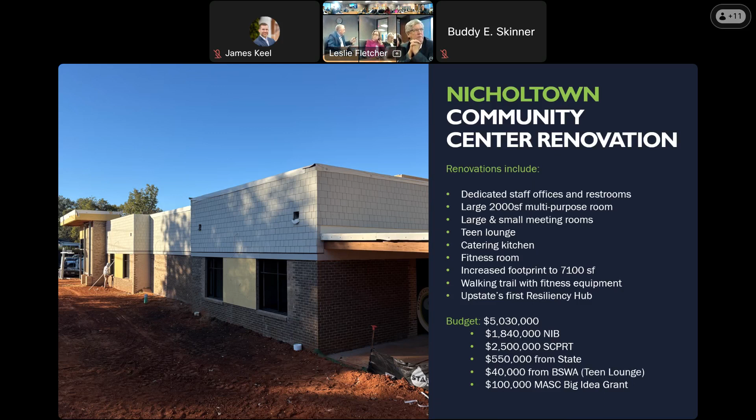That is, well, let me get one more. So this is my list of nine slides, and if you do the math, that's around $6 million in NIB funding. We have two that are working on now: the David Helms Community Center court replacement, and then Cleveland Park, the zoo shelters, walkway, and the playground are upcoming projects that will get underway in 2026.

Thank you, Jeff, very much. So before we move on to our engineering team, are there any questions for Jeff concerning any of our NIB projects that he's been working on?

Just great progress, and it's just hard to put into words, the quality of our recreational activities and facilities now is night and day difference from 10 years ago.

We're gonna have to get a lot done in a couple of years. We really upped our game on everything.

Well, think back to the parks plan from 20 years ago and how the newspapers reported how horrible our recreational facilities were and how they were in such a deteriorating state. So we've come a long way. Really have. It's great, quality is the word for everything y'all have done. I appreciate that.

We've been busy the last several years with our NIB projects.

What's the plan for expanding the resiliency center idea to other places? I think we want to get this one implemented, and then if we think it's a good model, we could look at other community centers for additional resiliency hubs in the future. Okay, and I think that would be the plan.

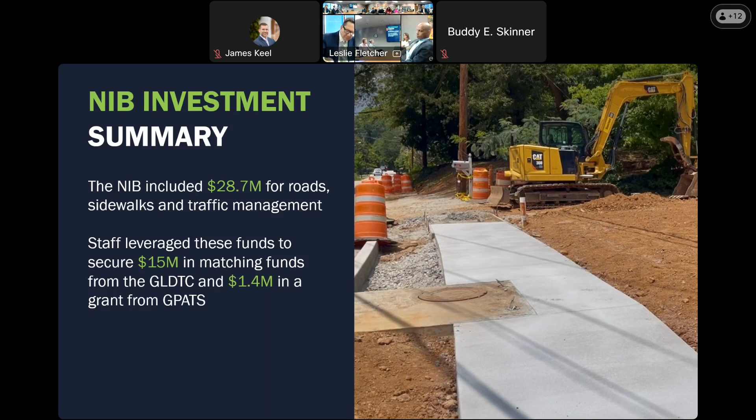One of the big things our team is proud of is obviously it was a huge contribution from the NIB, 28.7 million for roads, traffic, and sidewalks, but we wanted to look and see what else we could do with that money. How can we leverage that for more? Between GLDTC and GPATS, we were able to get 16.4 million in matching on top of that 28.7. So we were able to take that money and take it even further, and I think that was a huge win for everybody. It allowed us to get a lot more done with our dollars.

Another big thing to point out is we were able to look at our existing programs. Instead, we ended up getting a CDBG loan, and that helped us get even more sidewalks done with this process. So we realized we were getting a lot of work all at once. It ended up being 37 total projects, and we're in the final stages of a lot of them, but we finished 26 of them. So in three short years, we managed to get designs going, get the projects out on the road, and get them done. We're moving fast, but it's been a really fun process.

This is just a quick summary of some of the roadway projects that we were working on, and my team, Dakota and Greg, are here. They've been working very hard on a lot of these and making sure that they get them out the door.

The ones that I want to highlight that are not done yet, the two main ones would be resurfacing, which we just actually got additional matching dollars for a few months ago. So that's why that one's going to take a little bit longer. We're hoping to start construction on that next fall, but we're getting those last bits of matching dollars. Is that C-Fund matching? It is. So we were trying to wait for that last little bit of matching dollars before we wrapped up resurfacing.

And then bridge maintenance. The Willard Street Bridge replacement is the piece that we've all been waiting on, and it was ready to go last October, but Hurricane Helene had other ideas and knocked out the Hudson Bridge, which was our detour route for the Willard Street Bridge. So that delayed us a little bit, but Hudson Bridge is actually making good progress now. It'll probably be open here in the next few months, and we'll be able to get started on Willard Street. Just for clarification, Hudson Street Bridge is a SCDOT project, it is not in the NIB. It's merely a delay for us getting the Willard Street project going.

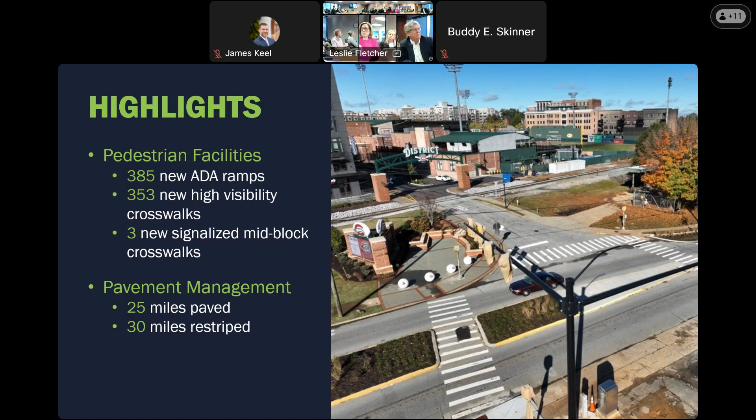We're able to implement traffic calming pieces. If you look at the Mohawk Streetscape, there's a new speed table at that intersection.

I mentioned 8 miles of new bike lanes, but on top of that, 21 miles of enhanced bike lanes. That might mean we're paving a road and we're able to add in some protection or extra buffers between the bike riders and the vehicles. And then obviously 7 miles of new sidewalks.

Eddie, I don't mean to put you on the spot, but what's the going rate of what we typically do? Well, we used to do about a mile, now we're down to about a half mile with funding, or a little less. So that means like a million dollars gets you half a mile now? Yeah, not even quite a half mile. Wow, so that's the equivalent of 14 years worth of sidewalks done in the last 3 years that Eddie's been able to do.

Just a few pictures - this is the Pendleton Road Diet, which had some NIB and some state funds, but it goes to show what we can do when we're able to take a corridor, take a project, and look at it holistically. How can we make this better for drivers, bike riders, pedestrians, all at once? This project is still not quite done, but it's come together quite beautifully. If you look at the aerials today versus what it looked like 2 years ago, it's night and day - it's just an incredible project.

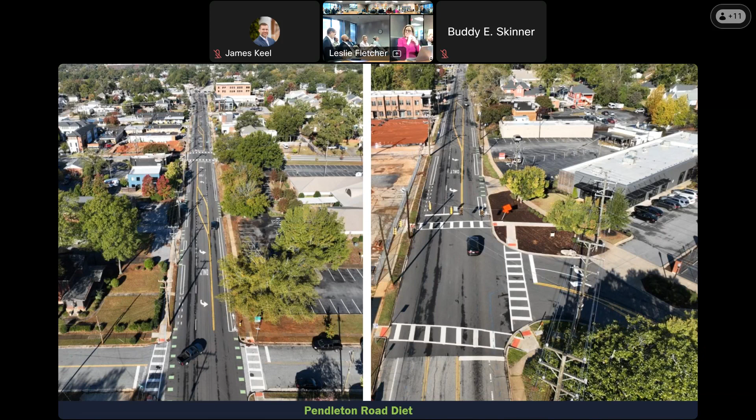What's your big picture in terms of our ability to do this in the future, in other places? Feel really good about it. In fact, on the agenda tonight, Pendleton Street's on our list for taking over from SCDOT. So obviously, when we take roads from DOT, it improves our chances of being able to do projects like this.

DOT's been very receptive to our project ideas and requires us to go through a process with them. They were involved in our West End neighborhood master plan, a small area plan that was done where this project, Pendleton, was identified. So that was helpful as well.

I think that the 2 projects we're talking about, pedestrian safety and NIB, one of the better parts was SCDOT - Brandon and Joel and their team are involved in all of our planning processes up front. Getting them involved up front allows them to be part of the team, so we're not just coming to them with projects we want to do. They're in on the upfront of the ideas and the master planning behind those projects. It really helps us work as a team to get a lot of these done.

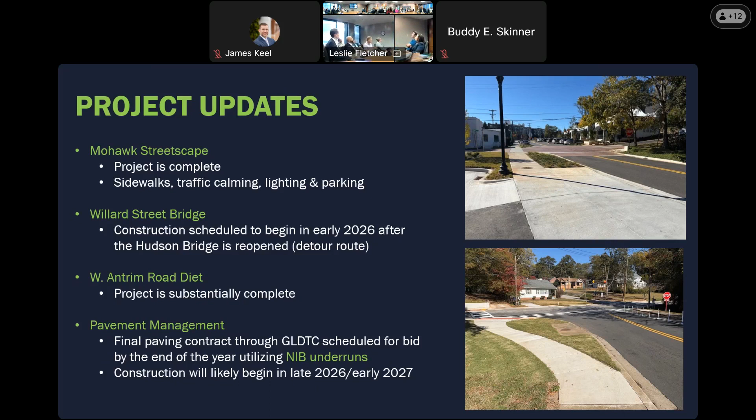A few of these - I know I jumped the gun and updated you on a few - but Mohawk and West Antrim are 2 projects recently completed. We wanted to point those out if you haven't had a chance to go by either of those. They're 2 really good projects we just recently finished.

Here's some pictures of Antrim and it's done - that's actually an 8-foot sidewalk. This is one of those pieces where Greenacre has some bike lanes, and eventually we're hopefully going to have this connection piece between that neighborhood and going down Lawrence to get to the Swamp Rabbit Trail. So it's a good project in its own right - there's lots of people using the sidewalk, but it's also a small piece of a larger puzzle that will come together later.

That's Eddie. Awesome.

Well, it's kind of hard to follow up from everything he said, and I'm probably going to repeat and duplicate a few things. This is a summary of all the sidewalk projects that have either been completed or are in construction.

With all the additional funding we had in the NIB, the C fund money, special emphasis money, and some instep money, we're going to have completed dead on around $17.5 million worth of new sidewalks. That's 7 new miles of sidewalk. Everything is turning out really, really good.

Real pleased with how everything's looking. You can see from the list, we've got them scattered all over town. We've hit about 5 special emphasis neighborhoods - the southern side, West Greenville, Pleasant Ridge. I'm drawing a blank now.

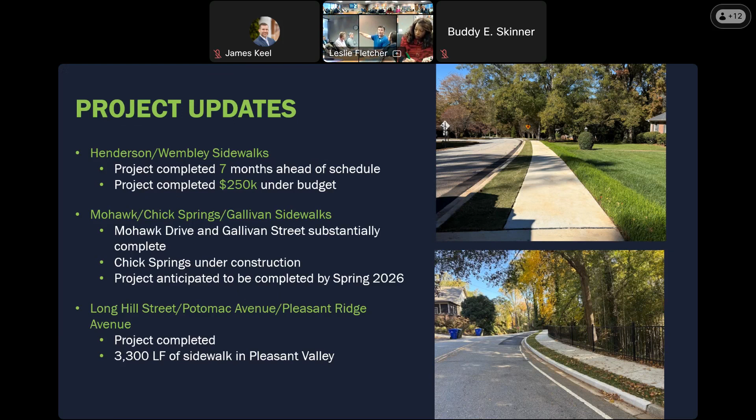Now these are all NIA projects. We just talked about the Lowndes Hill Hillside intersection. We've got Lowndes Hill Road coming up, hopefully bid out in spring, maybe in construction. Then we've got Keith Drive and also the little piece of Lowndes Hill, separate from the one we got TAP funding for, which is on the east side of Keith from there northwestward. That will all be managed and bid by CoTransCo. And we're under construction with Webster and Clark, so that's going to be a great project there.

Eddie, once you get past the Clark Street section, will it start to move a little faster along Webster? Oh yes, that looks more doable. That piece of Clark, we had to do some deep pipe work, there were gas lines we were having to miss, a lot of stuff like that. Once we get the pipe in - we had everything GPR'd, so we tried to do our due diligence, but some of it was missed, we found out in the field. But once we get through that, it'll start moving really fast.

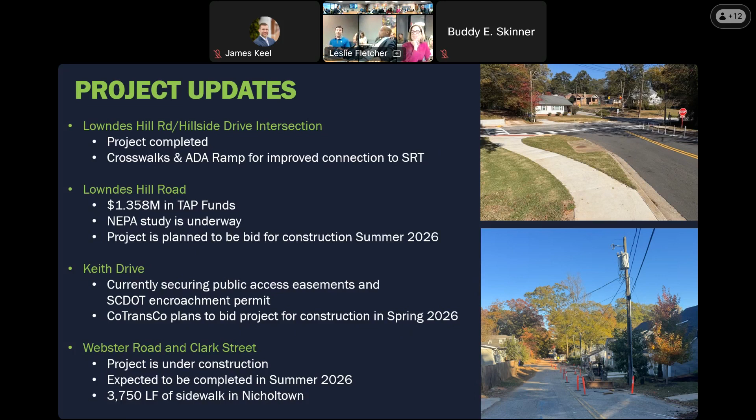Are we good on rights of way on that? We are good on the rights of way, no outstanding issues on that. Fantastic. So hopefully, with it being bid out now and holidays coming up, we get a contract by late winter or by March, we should be in construction.

We're back in Alameda. So you're going to be able to walk from Lawrence Road down Webster, up Clark, and all the way down Alameda to East Parish, or you can get up Rebecca to the community center. So it's, I don't know the exact amount, but it's around 5 to 6 million that's sidewalks done in that area. It's going to be great.

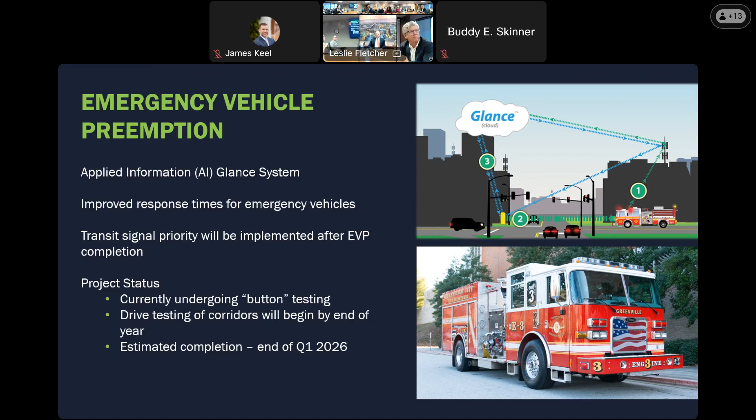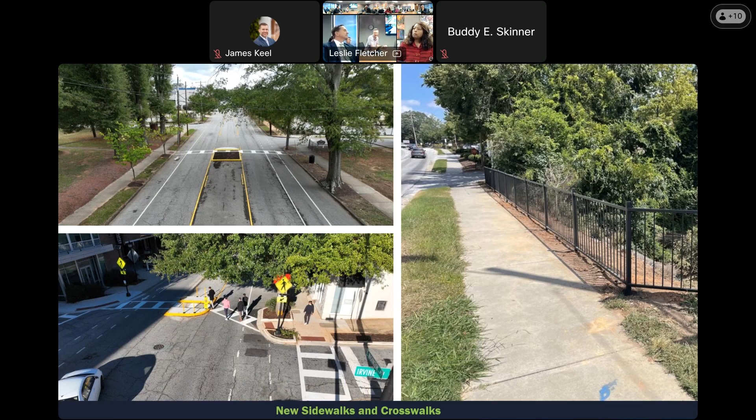Is there any hope for getting artistic crosswalks, like murals or something like that? We have been having conversations about piano keys and that kind of thing.

We can follow up with you on that. We've been having some conversations on that, especially in the village.

It's funny, Councilmember Workin and then Councilmember Dow. I just want to say big thanks.

One thing that we don't think about, I know y'all do, but the number of people who come to me and us and ask for sidewalk repair, not for aesthetics or strollers, but for disabled individuals who may not have a good gait as they walk and don't get their feet up. For example, we've got some Alzheimer's folks in our neighborhood we've talked to y'all about, and you gratefully came out and repaired those sidewalks, because they're important for lots of reasons. So appreciate all y'all's work.

Thank you. Councilmember Dow? I think I should have asked this in the TMC. Am I allowed to circle back? Yes. We had an issue with some signals, I can't remember exactly what it was, Pete Hollis area, connectivity of the Blue Toads there to the TMC. Did that get rectified? Yes. Okay, so are we fully reading every intersection in the city at this point?